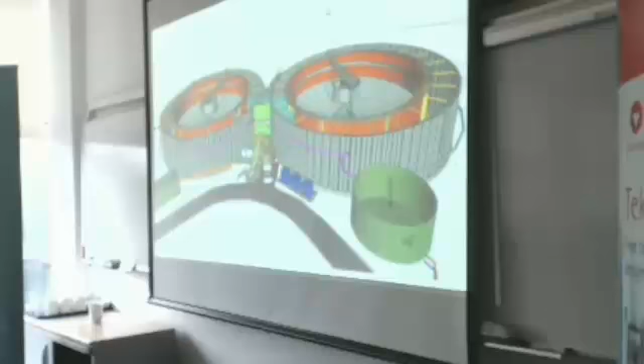So this is something we did for Anglian Water Utilities, done in SketchUp because it's a very intuitive, free and easy to use tool, and we do quite sophisticated projects in very, very simple tools. This is something we did for Met Police.

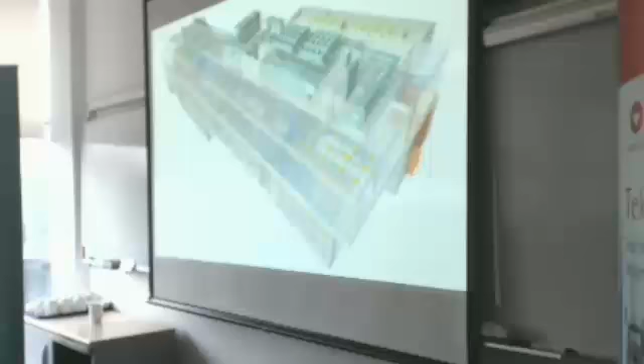That's that project using timber panels, and again this is a fully coordinated fabrication model. As Richard talked about earlier, we built the whole building in the model before it ever got to site. There was virtually no waste from this site because all of the coordination was done through the model, all the pieces fitted together, and we had no trade contractor drawings for the superstructure and all the MEP and the timber panels, because again, all we did was use the models. We didn't need to produce drawings.

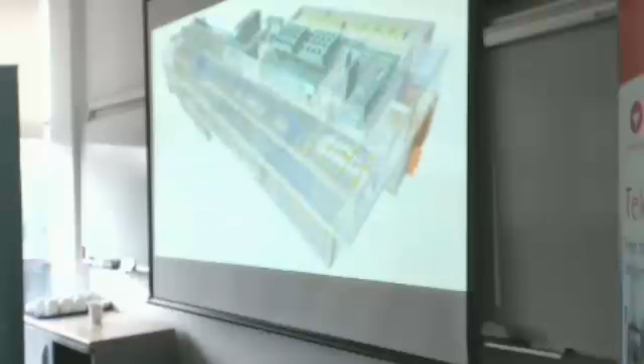So the efficiency, both in the production of information and the coordination and on site, was phenomenal in this, and it was a completely new way of working. It was driven by some unrealistic timelines set by the client, but actually forced us to find some very innovative and sensible ways of working, which we now roll out on projects.

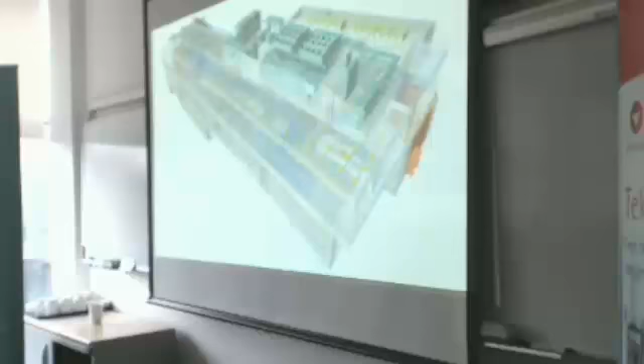This is a different type of model where we've used the same software the car industry uses, and we've developed things down to the level where each of these components knows what it's made of and how much it weighs. So this is a virtual craneage study, so we can work out what's the biggest thing you can lift by crane, how you can safely move things around, how you can construct the building.

This actually never got used in the end, but this was the cheese grater, and that principle that Richard talked about, that building 47 times before we hit site, that's exactly the sort of thing that we're trying to use these models for.

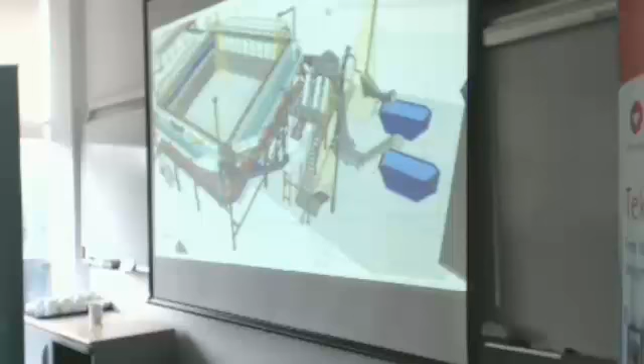So this is something we did for Anglian Water. Again, it's showing the background to how we approach Gutenberg. This is similar to the project I showed before. This happens to be a stormwater tank, so we do a mix of all sorts of sectors, but one thing we're getting into now is utilities.

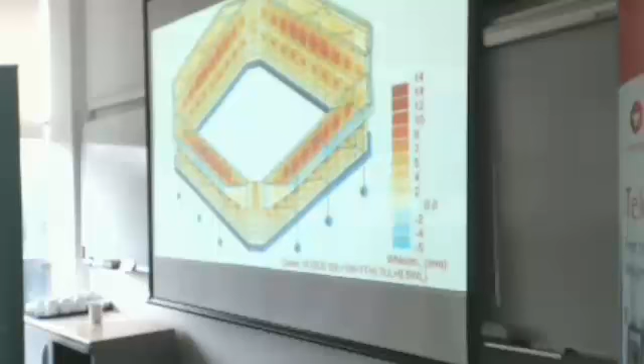And it was turning what would normally be a big civils job, so blokes with spades digging in the ground. We took it out of the ground and turned it into something much more like the oil and gas industry would do. And it was completely mind-bending for Anglian Water, but now we've done it, it seems like a completely sensible approach.

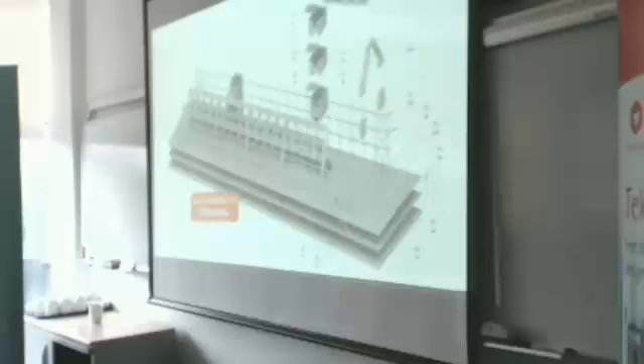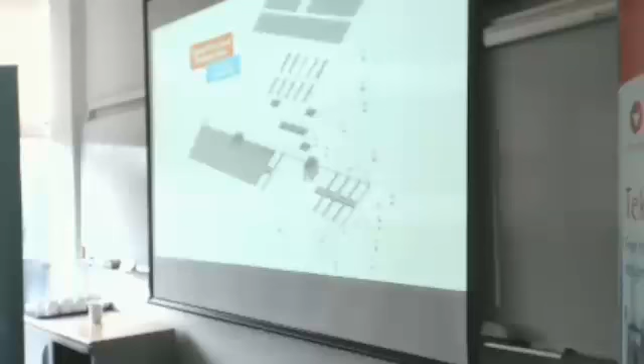So we can do these sorts of studies where we can schedule out virtually everything that goes into a building before we really know what the building looks like. We've got lots of these studies.

We use the kit to start to develop health and safety principles. So we started looking at how you would build these buildings, building in safety zones. You could be building the frame on the upper stories while you're fitting out on the lower stories, and what that looks like and how you can use those sorts of things to optimise your construction programs.

Off the back of that, we were producing installation guides, logic diagrams, planning sheets and 4D models, again so we could really test the building principles and optimise everything before we ever got close to designing the building and hitting site.

We were working at this sort of level of detail where we were developing all the interfaces and connections for the key MEP parts, again before we did the build.

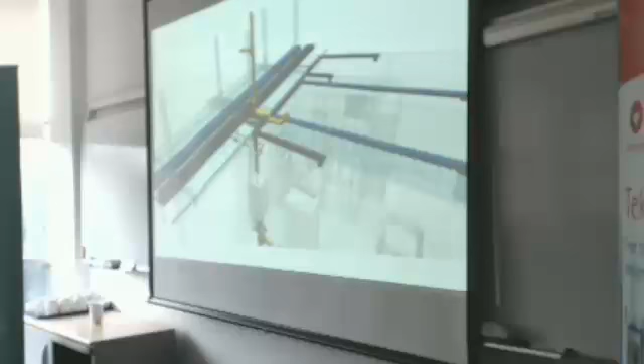When we did the final presentation to the clients of all of the elements in the library and how all these interfaces work, it took about 4.5 hours to go through them. I haven't got time to explain all the clever thinking behind this, but you just have to take my word for it — it's quite clever, quite amazing.

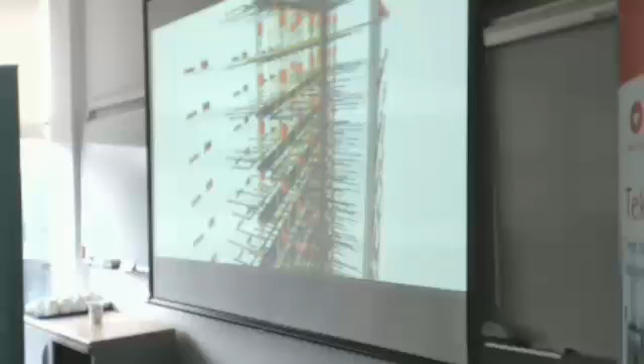This is, again, one of the studies we started doing to look at the degree of repetition you get across blocks. We were setting out all of the key M&E principles across the entire territory, so we had a good understanding of exactly how the utilities and the vertical interfaces worked before we started building buildings.

So we were working at lots of different scales, producing 4D models of buildings generally, right down into the detail of exactly how these little bits work, how the drainage connection works, and how the bathroom goes together.

Before we started designing buildings, we knew exactly how we were going to do fire stopping between slabs, and we knew how we were going to build the bathrooms, which blew the client's mind, but it was the only way we could control all these things before we let the architects move on.

We likened that to having developed this whole kit of parts. We had everything you need to make a car. What we then needed to do is teach the architects and the supply chain how to take that bucket of bits and turn it into one of these. It's actually a different car.

So we developed a series of tools issued out to the team. We did a design guide that we take the architects through, telling them exactly what rules they have to stick to on the plots and what things they can flex.

We always said we won't have developed every component you need to build every building, we'll have developed 80-90% of them. We encourage the architects to bend the rules, to break the rules, to say it'd be useful if I had a widget that did this, and we're constantly trying to refine different parts.

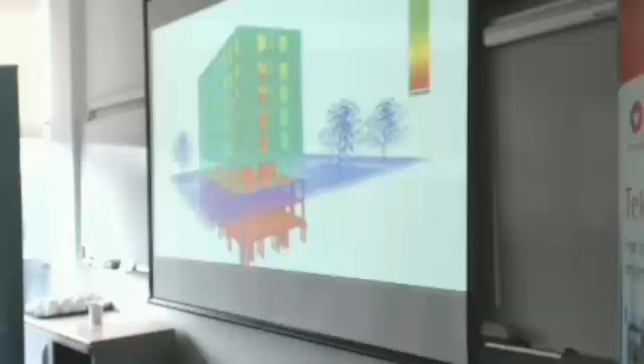We have all of these standard interfaces and details that we can start to engage the supply chain on, getting into lots of detail around how quite sophisticated bits of building come together, which we can then give the architects as this palette of materials and language of architecture.

As we developed the kit of parts, we were talking to the cost guys about what sort of things we need to extract from this so they can do cost planning. We were also talking to the logistics guys about what they need so they can do supply chain engagement, logistics planning, vehicle planning, and all of those sorts of things.

So as long as the design teams use this guide, they're actually producing vast quantities of information in the same time it would take them to normally produce a set of drawings of the buildings.

We produced a fit-out guide so we could talk to the marketing people, again getting into lots of detail around the finishes, the materials, the colours—all the things that make up the lifestyle sell—to make sure we have continuity all the way from initial design stages right through to delivery of construction offsite.